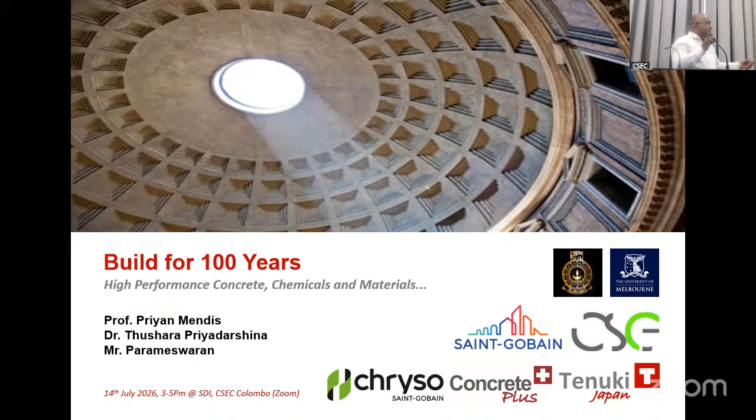This is where I studied, Civil Engineering, and this is where I have worked. I have been in the industry, corporate sector, as an engineering contractor and engineering consultant in different phases. Then I joined Holcim, worked there for almost 10 years. Holcim then became Lafarge Holcim, then Insee. Later, after my PhD, I joined Open University, where I can work until 65.

This is my corporate background. I have been chairman, as I was told, for 2 years. At that time I was director for the Tea Board, National Institute of Plantation. Then at Thurusaviya I was chairman for a short period, about 3 months, just to close it. Then director for the Tea Board, I was coordinating secretary for the State Minister for almost 1 year. I was also director for International Relations at Open University, and I have two companies, but very small ones.

Out of all this, I have been in many industries. I hope today I will share my experience with you, especially related to concrete, which I have been practicing for over 20 years.

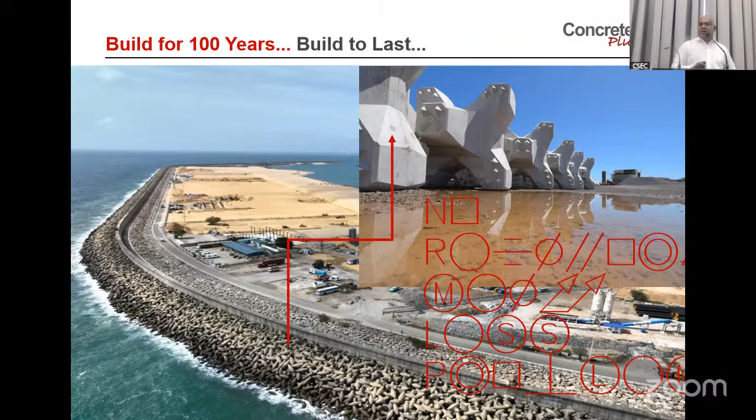So then if you use reinforcement, actually concrete is like our body. Because we are going to design for 100 years, we should imagine how we can do it. So like our body, why don't you resist for, say, at least 70 years? Because you get some issues from outside, so you have to protect your concrete from outside. And there will be some issues inside, like cancer in our body.

Concrete. But today we are not going to discuss all the durability, what are the types of durability. But I'll tell you how you can design a concrete structure to last for most of the durability. So that's my main point.

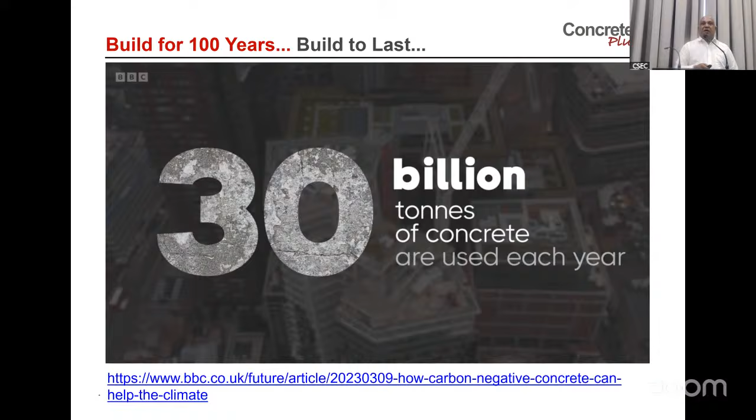So this is reinforced concrete 120 years ago. Concrete is used in the world at 30 billion tons. No one can avoid this material. It's the most used construction material, the highest one. So in the world, if you take almost all the major structures, they have been either concrete or

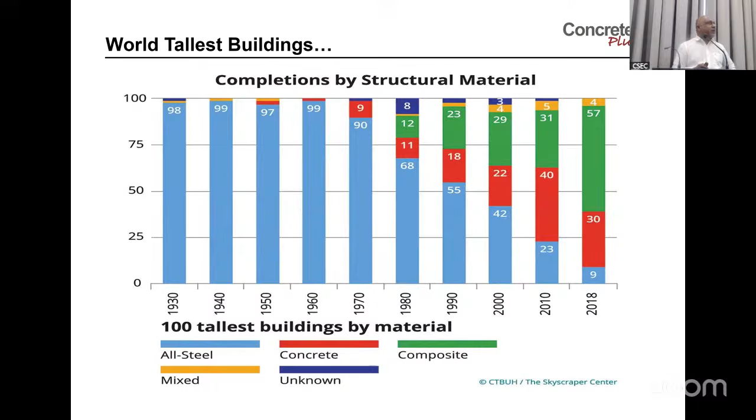So in Sri Lanka also we have similar structures. This is the history around 100 years back. No one thought that you could build structures with concrete, especially high-rise. But later, with the development of concrete and chemicals, people went into more concrete, and nowadays more composite. But the only thing is, you have to design concrete in a way that it lasts. So this is where high performance concrete comes in.

So if you have a question, what is high performance concrete? It's very simple. So what is normal concrete? You get cement, fine aggregate, coarse aggregate, water. And of course, you can add some other material, maybe fly ash. But when it comes to high performance, you add fly ash, then silica fume, or slag. In Sri Lanka, we don't really have slag. And actually, some countries add finely ground mineral.

So even though we don't like, I think you don't like quarry dust, you know. Nowadays, you are allowed to use manufactured sand or quarry dust in concrete. But if you recall 10 years back, no structural engineer allowed some of these materials. They wanted virgin sand. So some countries add finely ground material into concrete.

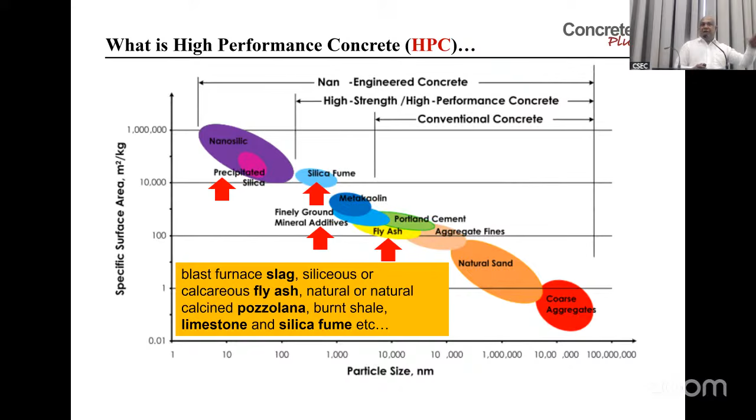So as an example, cement fineness is around 3,000. Okay, this is a number. But this fine material is around 6,000, even double the fineness of cement. They add this material to make the concrete dense. So it can be nano material. Likewise, we can work. First of all, we need to understand the physical and chemical properties, then how much we can add and what the optimum levels are. So that's my main frame.

So here, if you want to make a structure last 100 years, of course, you have to go back to basics. Just basics only. So you go back to basics. Okay, we go to the next slide.

So we know that concrete is very simple. You make it tight, so that is why we very importantly need to be careful. We need to know about cement, fine aggregate, coarse aggregate you get locally, fly ash, slag, microsilica. So first of all, in Sri Lanka, I'll just tell you the cement process. Whatever type of cement you make, first you need limestone. Then you go through this process up to the clinker level. Then you get the clinker.

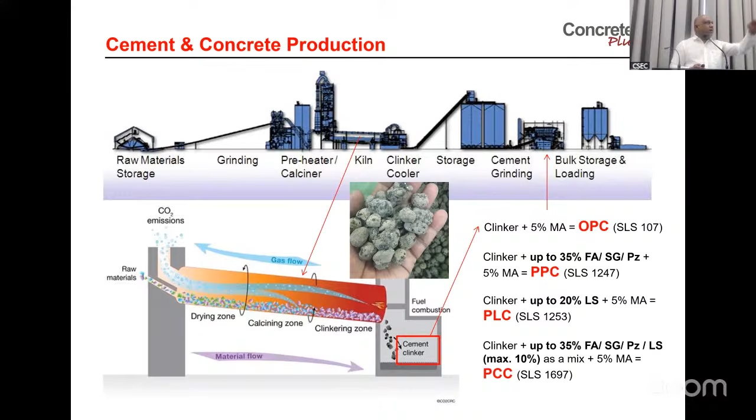So cement is clear. If you want to know more about cement, refer to EN 197-1. This cement standard is the European standard, and they talk about 27 types of cement. In Sri Lanka, most of our cements are derived from them. When I was in the cement industry, we had OPC and Holcim Extra, which is 21% fly ash, used for lower cover. In between, we found another cement with 6 to 20% fly ash, which is good for high-rise buildings.

So this is the standard. If you want to refer to it, you can download EN 197-1 2011 from Google. Later versions are there, but this one is downloadable.

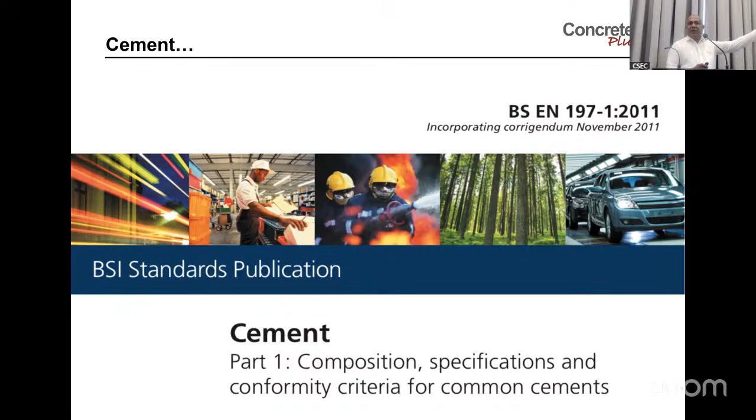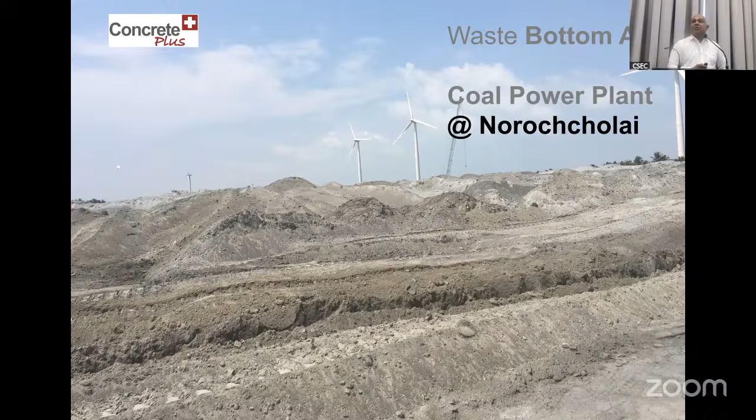If we go back to the materials we can add into concrete, it can be fly ash. This is not the power plant; what you see here is the coal yard. When you burn this coal in the power plant, you get fly ash as a byproduct. What you see here is bottom ash. It's a yard, so no one uses it at the moment. There's a huge amount of bottom ash at Norochcholai. This photo was taken years back; I'm sure now it's more than this.

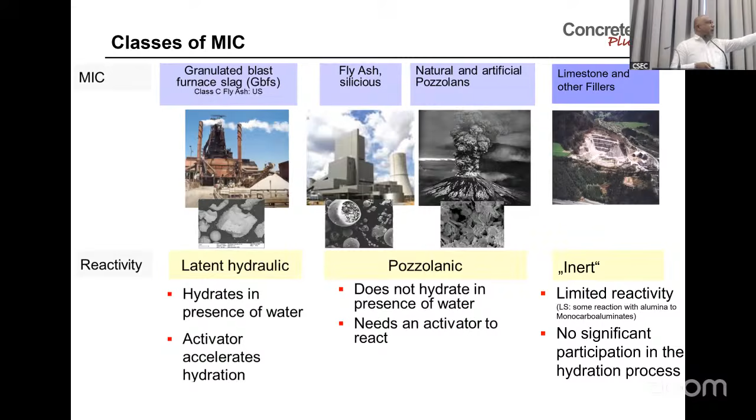Other pozzolanic materials are flaky. This is the same thing, so I can skip it. Clinker has a fast reaction, slag a very slow reaction, fly ash no reaction, and fly ash plus lime, there's a reaction. So cement has a reaction, slag has a very slow reaction, and all the pozzolanic materials react when there is lime. That's why in the past they always used ash with lime. To activate any kind of ash, you need lime.

If you can play this. Okay, no, forward.

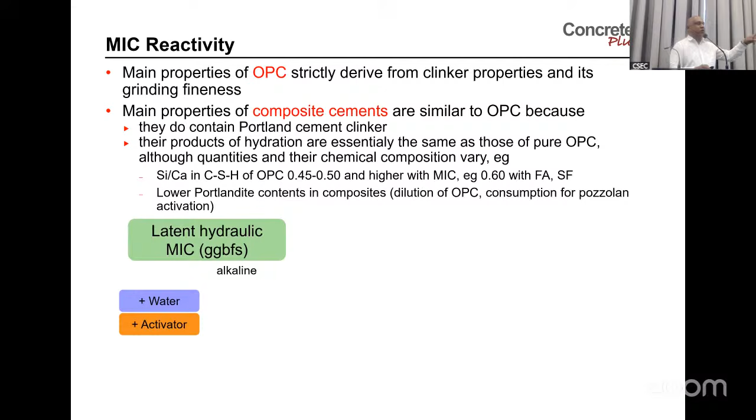The same thing is shown here. Slag, you need water, then the activator. Portland cement, you need just water. And pozzolana, you need water plus lime. From everything we produce calcium silicate hydrate, CSH, which is responsible for strength.

So if you have cement, you just need water, then you can have strong concrete. If you have pozzolana and you add lime into it, you can have concrete. This is what we call geopolymer concrete. Different words can be used, but any ash can be activated with lime. Slag similarly, you can go with an activator.

This is a very small concrete particle. If you see it through the scanning electron microscope, it looks like this, like a jungle within the concrete. What you see here is a very small one. It has to be gold coated or carbon coated, then you put it in the machine. Like when you check your blood to see what is inside, you can check it. So this is inside concrete.

You can see the magnification is 5,000. So it's like a jungle. It's like an X-ray, actually better than an X-ray because it's enlarged. Then whoever knows about concrete can tell us what is inside and what is going to happen. I'll show you a very good example.

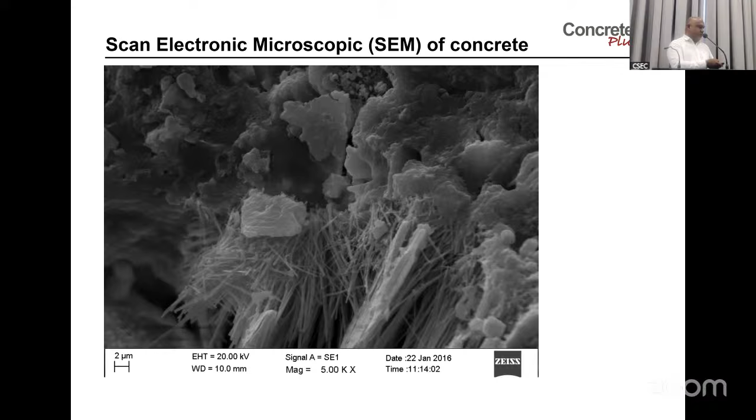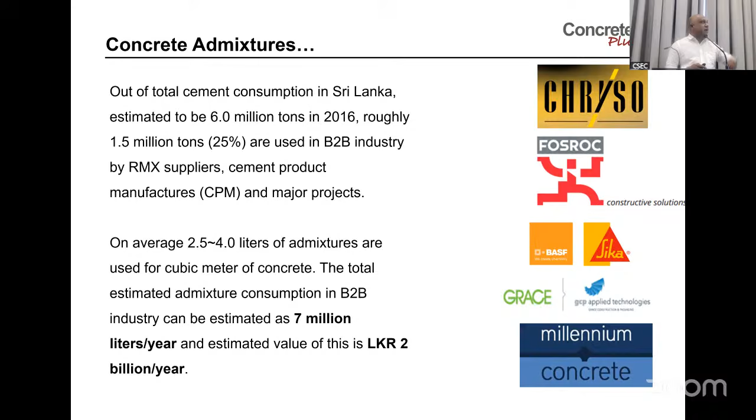So with the development of chemical admixtures, the industry has gone to a different level. Actually, Mr. Param in the second session will discuss chemical admixtures. And especially today, he will stick to waterproofing in the basement area. But he will just tell you about both of the admixtures.

So this is the concrete specification, BS EN 206. There's a complementary specification as well. So if you want to know anything about concrete, this is the specification to be followed. So I tell you, even though we have thousands of specifications, in concrete, always the basics matter. That's it. Nothing else. If you stick to basics, you can make wonders, you can make structures. I'll show you why. If your water cement ratio goes beyond 0.5, there's no point discussing durability. There's no point of discussion.

Plus, as I previously mentioned, when you add reinforcement into your concrete, we assume that your concrete is homogeneous. All your calculations assume that. So you have to make your concrete homogeneous. There should not be honeycombing and all others. Of course, there will be, but at least you have to protect your reinforcement. So the most important area when you add reinforcement in concrete is cover. That's very important because you have to protect it. It's like our body, you have to protect everything from outside. So you need to have very good skin on your concrete.

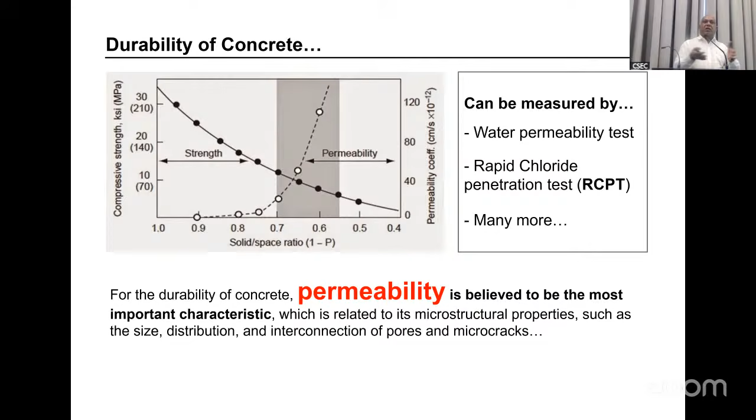So all these theories tell you the same. This shows in different ways how it works. You have to reduce permeability in your concrete, and of course it will increase durability. As I mentioned, today we are not discussing the different durabilities. But if you reduce permeability, water permeability will be low, RCPT will be low, all the material brought into the concrete will be very low.

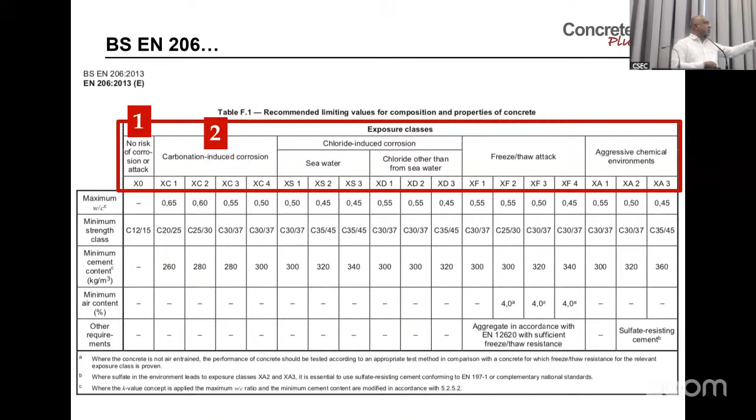The second one is carbonation. In carbonation, why are you allowed to go up to 0.6, 0.65, etc.? Because the carbonation depth per year is around 1 millimeter. So if you have a 50 millimeter cover, just to reach there it takes 50 years. So that's why there is a little bit of relaxation. But if you have corrosion induced by seawater, then you see the water cement ratio is limited to 0.5. Other than seawater, sometimes you also have a maximum of 0.5.

Then freeze-thaw, we don't have much here, but heating and cooling is very similar to that, but we don't go to that extent. And aggressive chemicals, these are the most common ways. So these are the recommended maximums. You have to be below them. That's why I told you that if you want to design very good structures, please be around 0.4.

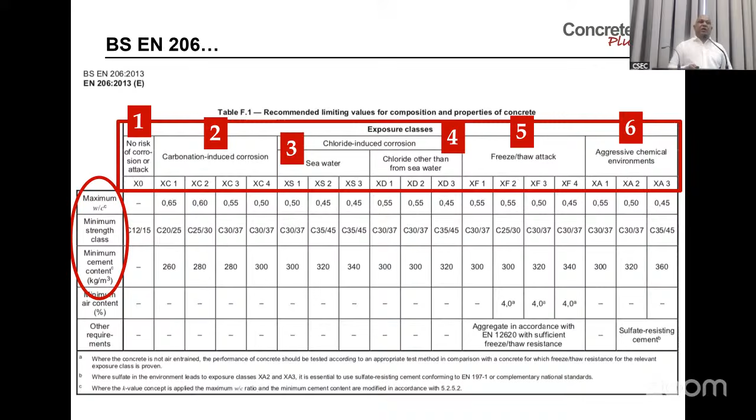And second, the minimum strength class you also need to be careful about. What are the minimum strength classes? Then the minimum cement content. Sometimes you don't worry about the maximum cement content, but maximum cement content is also very important. I'll show you a very good example. You should stick to below 550, as in most of the standards. So all these standards tell you the same thing. In ACI, similar parameters are there. So I don't want to discuss it in detail.

So now I'll show you these applications involved, so then we can see how it's going. So this is Burj Khalifa. It's in a very aggressive environment. You can see the location has almost all the aggressive conditions. So as I mentioned, we don't want to divide into the different aggressive issues. We will address them as a whole, as a body. So we will make our body very robust, then no disease can come. A similar approach.

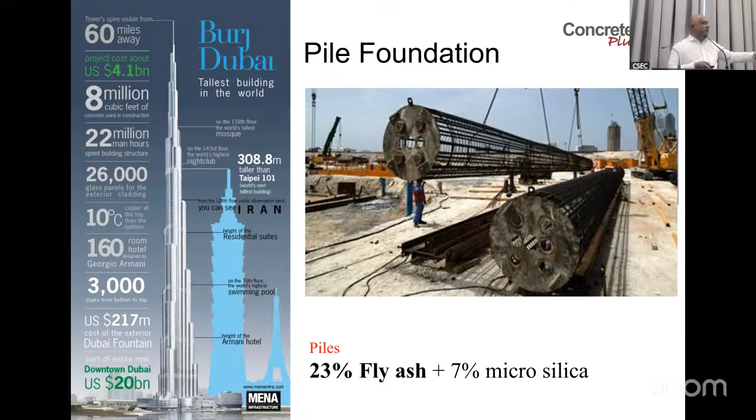But okay, as a contractor or anyone, once it is placed, you don't see it below. And workability really matters to you, isn't it? Workability really matters because in the ground, if everything flows and it's self-compacting, it works very well. So what material do you use? The best material is fly ash. This is the reinforcement structure, I don't want to explain it in detail. This is the process, but they have used this combination: 23% fly ash plus 7% microsilica.

So then our question is, why 23%? Why microsilica only 7%? Because just to have durability, if you use only fly ash, you need to have at least 25% fly ash. But when you use it in combination with microsilica, around above 25% in total will give you very high durability plus strength. So that's why they have gone with microsilica, to get the required strength, workability and durability with the combination. That's why they have gone 23%, higher, not 10%.

Now this is done. Second one, pile cap. What is your solution? Now it's easy, we have done one. What is your recommendation? OPC, fly ash, or slag? What do you think? In this case, as Mrs. Romal mentioned, you can go for fly ash, but they have used slag.

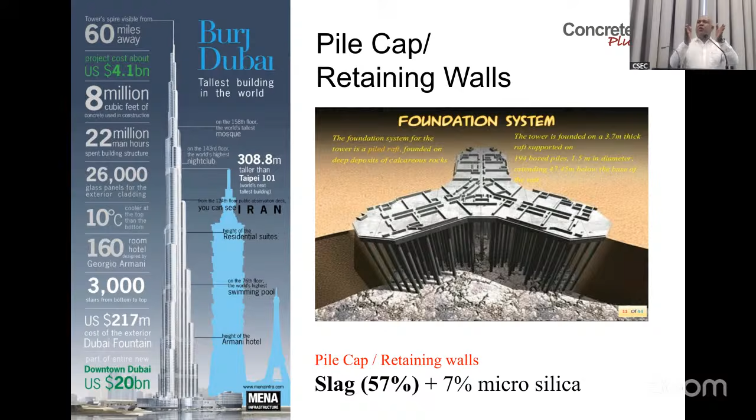You need to have at least 20-25% fly ash in that category. You add slag about 50, fly ash about 25. These are the things we need to keep in mind if you want durability. But if you want strength, it's a different thing. Microsilica, all standards limit it at 11%, so usually 5 to 10% is the very good area to use.

So the second case is over, now the third one. Now we are going to pump your concrete up to the top. They have pumped up to, I think, around 500 meters. Although this is 800 meters, so 600 meters. I saw a photo with Professor Rian at 600. So now you are going to pump this concrete - what is your material?

Fly ash, fly ash. Why is the amount low? Because the durability issues are not much there. Second, if you add more fly ash, strength goes down. So durability issues are not critical because they're at 18%, 18 plus 9 means 20 plus means durable. But you need to have certain strength. Strength is the critical one.

So this is all the columns and all that, and you should be able to pump the concrete. You can make the best concrete maybe in the Lotus Tower on the ground floor, but if you want to pump it to 300 meters up, it's a different case. Then you have to work on different workability and everything. Of course, what I'm telling is only about this material, but they have used a lot of admixtures, which I'll show you later. Technically, if you want to use this material, this is the general guide.

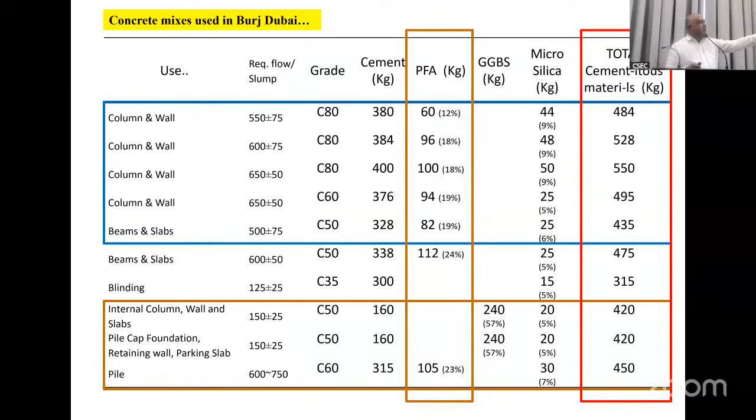You can see fly ash is in between 12 to 24%, and microsilica 5 to 9%. These are the things we need to get into our mind. Just thumb rules - as engineers we should know where these values are moving.

So this is the complete mix design of the Burj Khalifa, which is available on the internet. You can see the amount of admixture they have used is very high. Usually you use 1% of the cement in admixture, but here they have used up to 3%, 4%, sometimes even 7%.

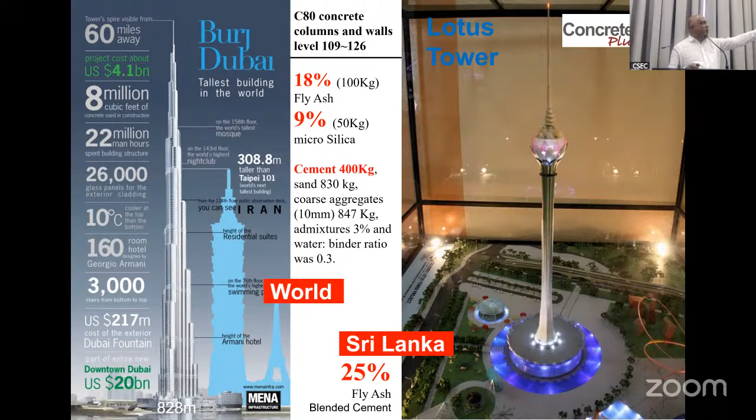Even though I show it nicely that when you add fly ash it flows up to 600 meters, it doesn't - but with the admixture plus the fly ash, it goes. That's why you can see in the Burj Khalifa they have used, this is grade 80 concrete - you can see how much cement they used, only 400 kilograms, this is OPC, plus fly ash 100 and silica 50, altogether 500. And they have gone up to 3% admixture, water cement ratio 0.3. And of course aggregate size they've reduced up to 10 millimeter because of pumping. So as I mentioned, even though there are 100 standards, if you stick to basics, you can make things last for years.

So I think I'll go fast. How many minutes more do I have? Five minutes. Okay, okay, five minutes.

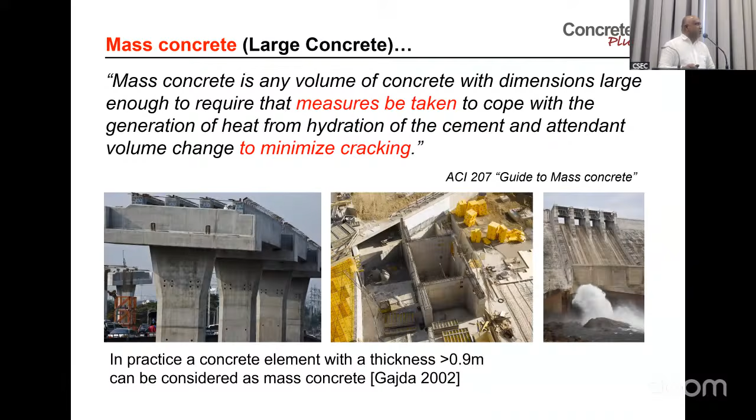This is what I told you about mass pouring. In mass structures, you need to stick to two things: one, the temperature at any given point should not exceed, very roughly, 70.

And the temperature gradient should not exceed 20. This means that concreting in Nuwara area, mass pouring is much more difficult than in town, because the surface temperature is very low, so the gradient can be higher in Nuwara.

So for mass pouring, you have to do concrete modeling. I think some of the cement suppliers have this, so you can model your concrete and see what the strength and temperature will be. So you have different challenges.

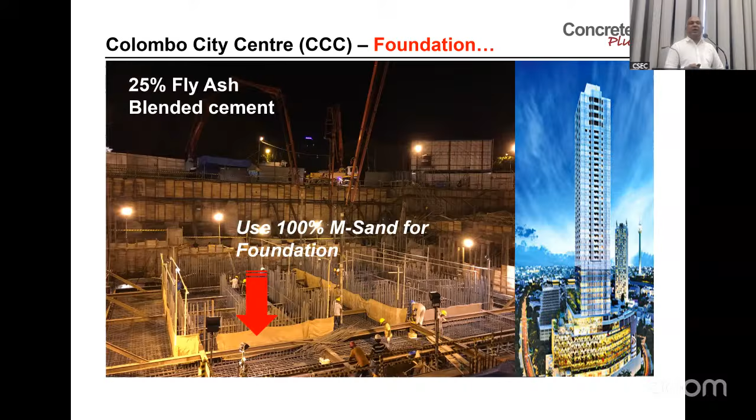So this is kind of the structure. As engineers, what we face is architects draw different drawings, but as engineers, we should be able to build it. When we build a vertical, they want to rotate it, then sometimes you have to make it turn. In the future, we don't know where it goes, so we have to be ready for it.

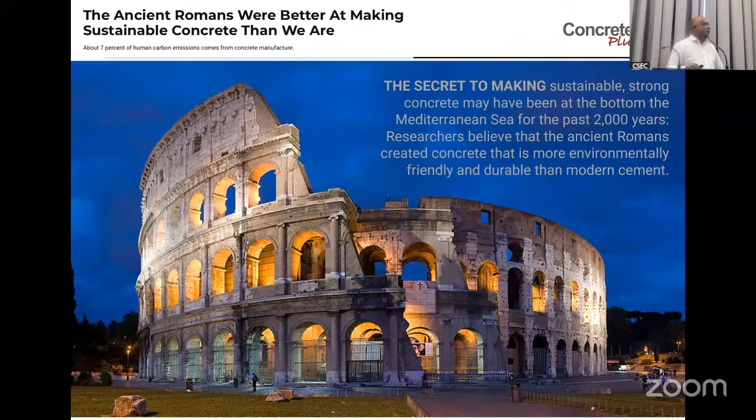So with that, the future of construction is sustainability, where we have discussed all these. I'll omit them because we have limited time. So as structural engineers, architects and all other departments here, I will ask you to use recycled material as much as possible, like in this building.

You can use anything in your home. As an example, I think he has used hair, clothes and all that. Even in the past, when we didn't have anything, they used horsehair in concrete because it's good for tension. It will not give you surface cracks because you can use just hair. We have a lot of hair, enough hair from salons you can collect and use it.

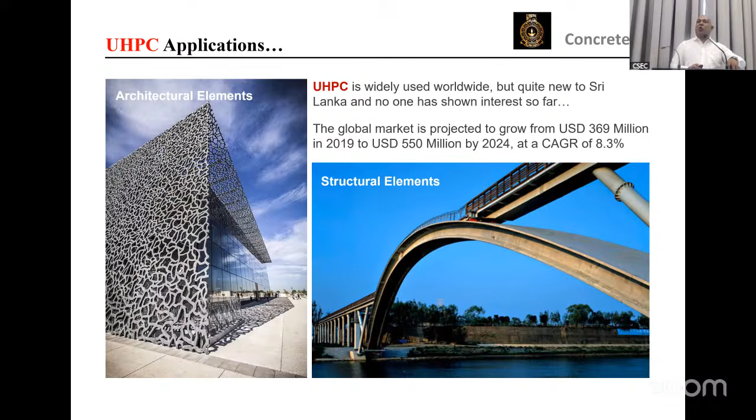And ultra high performance concrete comes into the picture. The maximum size of aggregate is 2 millimeters. So even though you say it's concrete, not concrete, we call it ultra high performance concrete. It's like a toothpaste-like material, which gives you 150 MPa. It's really good for this kind of cladding and all of this.

And this is an exact sample I checked in Malaysia, because they had done this structure in France when I was working with them. So we can go on to fiber reinforced concrete, self-cleaning concrete, floating concrete, pervious concrete. So likewise.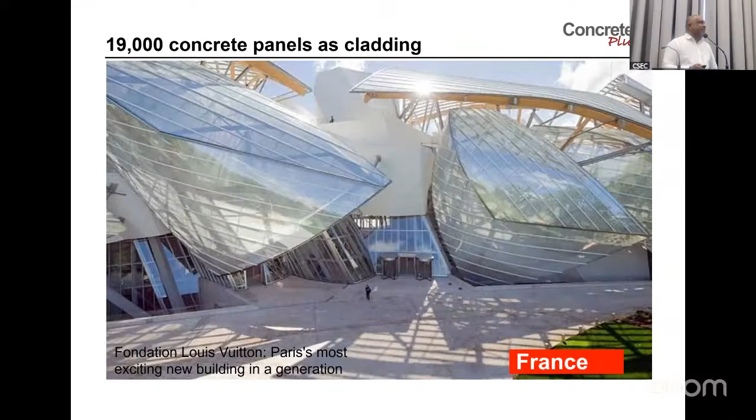This is facade. Some of the facade, concrete facade, is very popular. In the structure, 3D printing has come into action. You can even make concrete transparent. So with that, thank you very much.

But I think before I conclude, I will give you a few slides, as usual. So if you forget about concrete, it's okay to break rules.

This is how I worked as chairman. I think I was the only chairman who followed the speeches, but in the evening. So life is not meant to be too serious.

So forget about the concrete. Enjoy today. Enjoy this moment. Enjoy the evening. So if you can sleep tonight very well, then you are done. So one life, live it. It's not meant to be too serious. So wherever possible, find the joy. Work hard, play hard.

So be with your team. They raise you, please remember that. It's very important. Without the team, you cannot be a leader. Nowhere in the world has there been a leader without one. So if you can make your team bigger and bigger, you will become a better and better leader. That's very important.

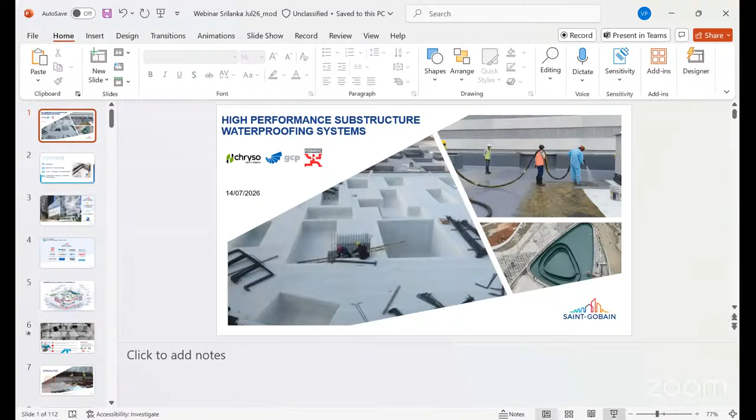Welcome you all to this presentation on substructure waterproofing system. Dr. Tushar talked about designing concrete for 100 years, and the various cement replacement materials. But when it comes to waterproofing, it is basically a system done as a barrier to prevent any kind of water ingress into the concrete. The basic necessity for providing this system is to enhance the durability of the concrete so that it serves its purpose for the design of its life.

In this part of the presentation, I will give a small introduction about our company, which manufactures waterproofing products. I'll give a briefing about why we need to waterproof the concrete structure, then touch upon some international standards used for designing waterproofing systems, and the different products and solutions available for substructure waterproofing. Today's presentation is mainly focused on the products and solutions used for protection of concrete against water ingress in below ground structures.

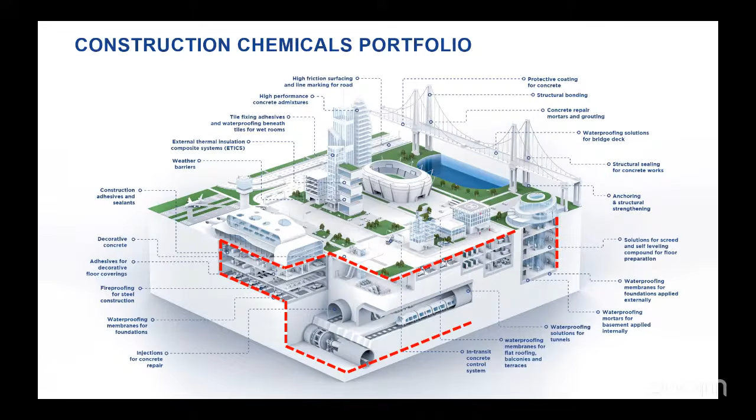When it comes to the construction chemicals portfolio of the CCB, we offer a very comprehensive product range for various applications in the construction industry, whether for building, infrastructure, energy, or other applications. We have more than 500 products broadly classified under 12 product segments, offering a comprehensive solution for the construction industry. I'm not going to talk in detail about all these products due to shortage of time, so I will jump straight into today's discussion.

When it comes to substructure waterproofing, basically for any waterproofing in concrete, first we need to know why we need to waterproof the concrete. Is it really required? There are some important reasons why concrete structures require waterproofing. One is that concrete is not always impermeable to water. During the discussion with Dr. Tushara, we came to know that one of the important tests for measuring the impermeability of concrete is the water permeability test, because when we do a concrete mix design, basically we design the concrete at a certain water cement ratio.

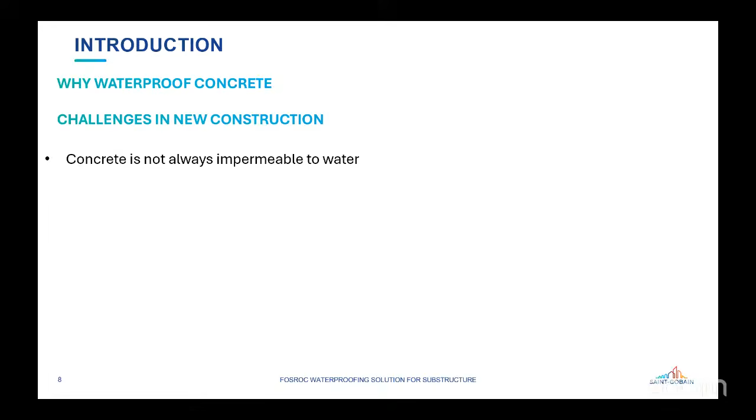If you take a concrete mix, the water cement ratio required for complete hydration of the cement is 0.27 or 0.26. But it's not possible to work with such a low water cement ratio because the concrete workability will be very low. So we normally add some extra water to make it more workable, and eventually that water leaves the concrete after hydration, leaving small voids and pores inside the body of the concrete. When this concrete is subjected to hydrostatic pressure, there could be water ingress into the concrete. So it's very important that we provide some kind of barrier on the surface of the concrete to prevent water ingress due to hydrostatic pressure.

Second is the bad workmanship or quality control issues and the honeycombs or voids that can come in a concrete structure. For example, it's not always possible to make a 100% perfect concrete structure. Sometimes we end up having some kind of defects such as honeycombs, voids, aggregate finishes, cracks, and many other defects in the concrete structure. So these defects will become a potential point for water ingress into the structure.

So it's very important that we prevent water seepage by providing some kind of a barrier system on the concrete surface, which is basically done with a waterproofing system. Also, we know that the curing of concrete is an exothermic reaction. It releases a lot of heat. So when we do concreting works, particularly bulk concreting works, where we need to construct a raft of thickness about 3 or 4 meters, or a roof slab, very thick concrete.

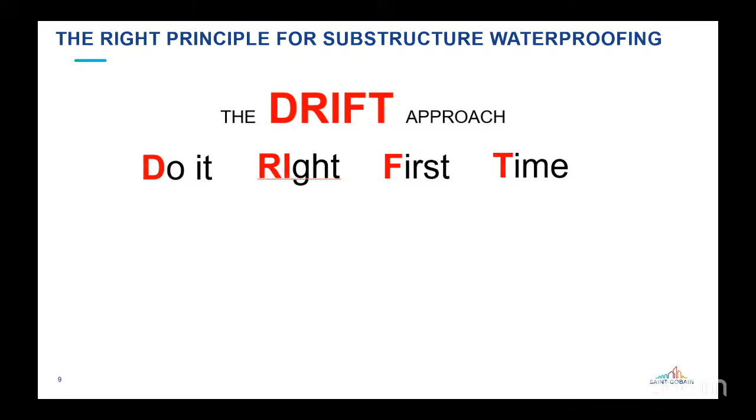So when it comes to substructure waterproofing, it's very important that we follow the right principle. I would call this a DRIFT approach, meaning do it right the first time. Because substructure waterproofing is unforgiving. If you make a mistake, if you don't select the right waterproofing system, it is very difficult to redo the waterproofing, because once you have the waterproofing treatment outside, particularly in a basement structure, once it is backfilled, if the waterproofing system fails, it is not possible to remove the backfill and redo the waterproofing.

So the only option is to provide some kind of treatment from inside, which will not be a 100% watertight system. So we must follow this DRIFT approach so that the right waterproofing system is selected and we do the right waterproofing the first time. So how do we do this? Prevention over correction. Quality has to be built into the design in the initial phases, and the clear requirements, specifications, standards and customer needs should be fully understood before execution of the work. Then we have to follow the inspection test plan, the method statement, the shop drawings, and every detailing needs to be properly done before starting the work.

And then we have to ensure that the work is done by a properly trained applicator. So all these processes are very important when it comes to substructure waterproofing.

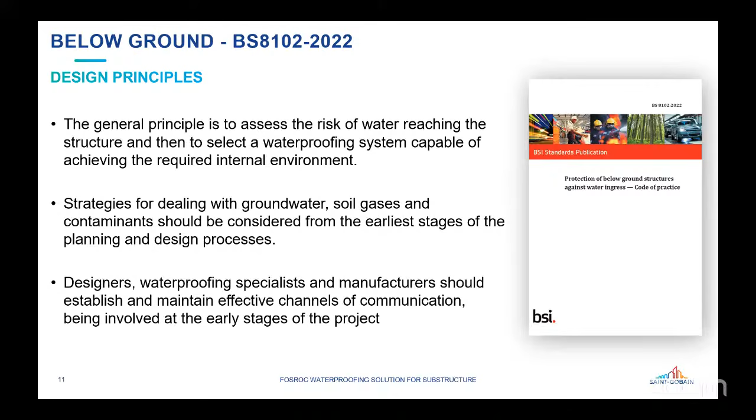Now, when it comes to substructure waterproofing, as far as standards are concerned, there is a standard which is very widely used all across the world, which is BS 8102. This standard provides guidelines for selecting the right waterproofing system for substructure waterproofing. It basically assesses the risk of water reaching the structure, and provides guidance on what needs to be done to select the right waterproofing system. It starts with the site inspection and data collection.

For example, whether it is a tunnel, any kind of underground structure or a building basement, the most important thing is to carry out the site inspection first, and data collection is very, very important. It talks about assessing the hydrogeology and the geology of the area. Basically the soil type, which is very important, because with different types of soil the behavior will be different, the foundation design will be different, and we need to ensure a proper waterproofing system is chosen for that particular soil type, so that it remains robust and can withstand any movement or settlement that may happen in the structure.

And then we need to evaluate the flooding risk in that area. Flooding risk, I would say that in some areas the groundwater table level can rise and can come down during rainy season, or you could be constructing a structure which is very close to an ocean or to a river or near any water body. So all the possible risks of water coming in direct contact with the structure must be properly evaluated during the site inspection. And also, like I mentioned, all the external sources of water also need to be properly documented.

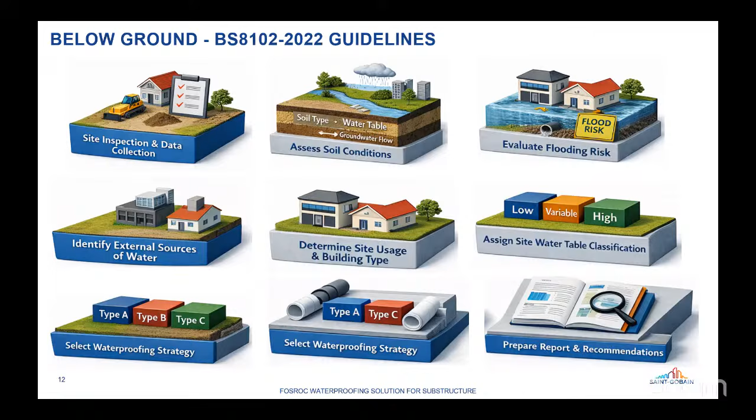So once the proper analysis is done and the site inspection data is collected, then we can make the right specification, select the appropriate material for that particular situation, and then submit the report for the consultant or client approval.

If you see, BS 8102 is a code which got revised again in the year 2022. As per the latest revision of the standard, the most important recommendation is that the waterproofing system used for the substructure should be a fully bonded waterproofing system which bonds to the freshly poured concrete. So this is very, very important. We will discuss this particular recommendation in detail in the next slide.

And then it also says that even if there is no water present at the time of construction or during any kind of survey, it is always good to consider some kind of water pressure, because many things can change during the service life of the structure. The water level in that area can rise, it can come down, or the hydrogeology of the area can change. So even if there is no water pressure in that area, we must consider a minimum water pressure of 1 bar while designing a waterproofing system.

And importance should be given to any kind of anchor piles, props, walling beams, pipe penetrations, construction joints; proper detailing needs to be done in the waterproofing design. So there are three important considerations for selecting the right substructure waterproofing: the groundwater table level, the intended use of the basement structure, and the construction method.

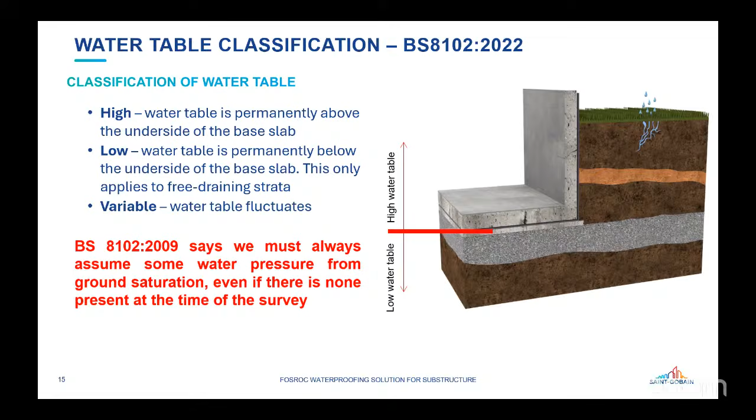So coming to the basement grades, the standard recommends three types of grades, depending on the usage of the basement and what degree of water tightness is required for the particular type of structure. So whether it is a car park where some water and damp areas can be tolerated, or a ventilated residential or commercial area where an absolutely dry surface will be required. So depending on what purpose this basement is going to be used for, we need to select the right waterproofing system.

And also it talks about the construction method, because when it comes to basement construction, there are different types of construction techniques that are used. We know commonly about the bottom up and the top down approach. So in some cases, the basement structure is constructed with some kind of a working space between the excavated surface and the retaining wall. You can see here.

This is basically called unconfined basements, where you can do the waterproofing and then you can do the backfilling. In some cases, these are called the confined walls, where the total boundary perimeter of the plot will be used for the construction. In this case, the waterproofing has to be done against the shoring and the basement wall will be constructed with a single side formwork.

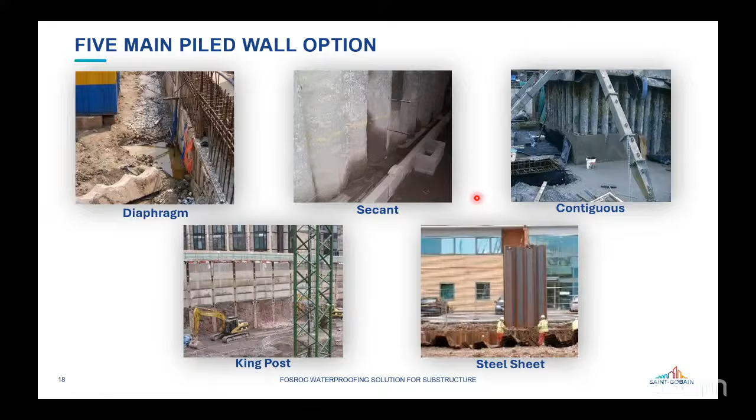So based on all the survey reports, we need to select the right waterproofing system for the basement. There are three types of waterproofing system recommended by the standard: type A, type B, and type C. So what is the type A waterproofing? Type A waterproofing is basically a waterproofing system done on the external side of the basement structure. Here we are providing some kind of an envelope, completely encapsulating the structure with a waterproofing treatment from the external side.

And in type A, we have the sandwich waterproofing system also. Basically, in this type of system you have some kind of a diaphragm wall, and then you're constructing a retaining wall against the diaphragm wall. So the waterproofing system will be sandwiched between the diaphragm wall and the retaining wall.

And then we have the third type of waterproofing, which is an internal waterproofing. Here you can see that the waterproofing system is applied internally, because if there is no external waterproofing, or if the waterproofing system has failed, the only possibility is to do the waterproofing from inside. So this is called the internal waterproofing system.

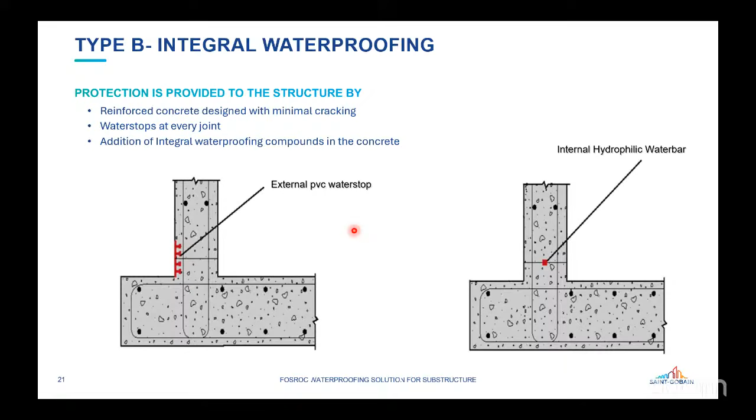So the type B system is basically an integral system in which we are trying to make the concrete structure itself waterproof by adding some kind of chemical admixtures to the concrete. And here only the joints will be treated. For example, if you have a construction joint or movement joint, all the joints will be treated with some kind of a water bar or a PVC water stop, so that the structure remains watertight.

So here the procedure is that we have to design a concrete with a very low water cement ratio to produce an integral waterproofing for the type B system. A concrete mix has to be designed with a very low water cement ratio. Once we reduce the water content in the concrete mix, the voids and the pores in the concrete will come down.

And then in the same concrete mix, you add another admixture, which is basically a crystalline admixture, which will react with the products of cement hydration and form insoluble crystals inside the body of the concrete, which will seal all the voids and pores. So the type B system, an integral waterproofing system, is a combination of two products: the first is a high range water reducer, and the second is a crystalline waterproofing compound.

And the third type of system as per the standard is the type C system, which is the drained basement. In this system, normally some kind of drainage layer is provided on the external or internal side of the basement, so that any water pressure coming on the structure will get into the drainage layer and get drained to the perforated pipes, which are placed in the soil below the retaining wall.

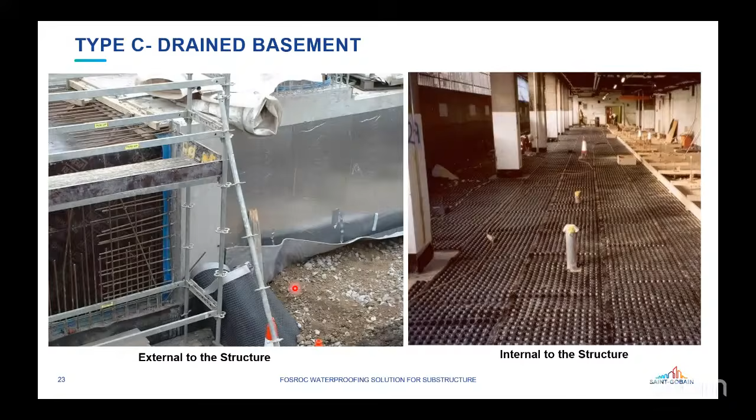So those are three types of the waterproofing system as per the BS 8102. So depending on the soil conditions and construction methodology and all that, we need to select the appropriate waterproofing system for the structure. So that was a briefing about the standards, the 8102.

And then there are the pile tops, pile heads, which require special treatment. And then we will have the joints and penetrations in the retaining wall or in the base slab, obviously the movement joints, construction joints. There could be some earthing rod penetration, rock anchors, then pressure release pipes, and then tie rod holes. So when we design a waterproofing system for a basement, it has to be a very comprehensive design, including all these penetrations, and then the retaining wall and the base slab.

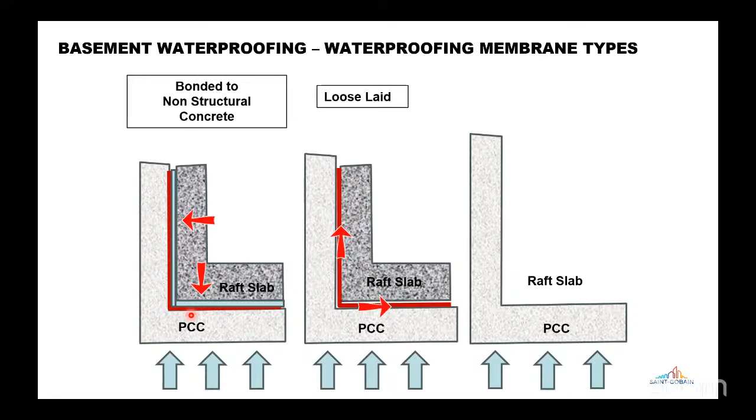And then the second system is basically a loose laid waterproofing. This product neither bonds to the structural concrete nor to the non-structural concrete, and it remains as a loose sheet between the structural concrete and the non-structural concrete. So this is another type of waterproofing membrane. And the third type of membrane is basically as per the BS 8102 standard, which is fully bonded to the structural concrete. So here, this product, when applied on the substrate, can bond to the freshly poured concrete. And what are the advantages of using a pre-applied waterproofing system, we can see in detail now.

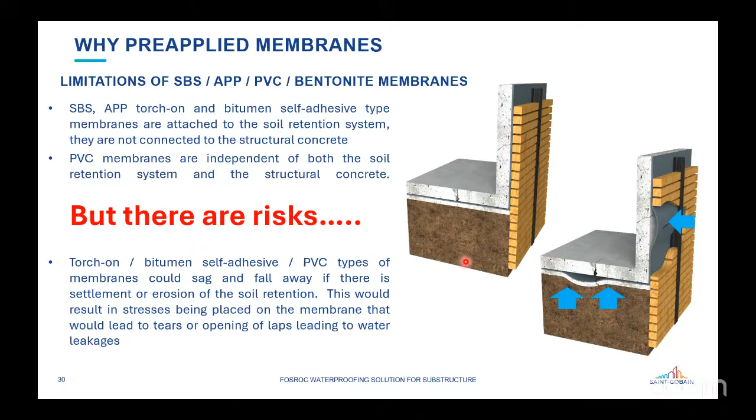So this is one of the biggest risks of a product which is bonded to the PCC, and there are a lot of failures we have seen with this kind of system, due to which new generation waterproofing systems have come to the market, and even the standard, BS 8102, recommends using that kind of system. The system I'm talking about is basically a pre-applied waterproofing membrane based on HDPE. It is fully bonded to the raft and the retaining wall. Here you can see that the waterproofing membrane is bonded to the raft slab or to the retaining wall. With any kind of settlement of the structure, even if there is a gap formation, since the membrane is bonded to the structural concrete, the waterproofing integrity of the structure can be maintained.

So this is one of the biggest advantages. And also these products are very good based on the application ease and a lot of other factors: cost saving, labor saving, many other advantages we can achieve by using this pre-applied waterproofing system.

Now, this is one of the products we have, which is called Proofex Engage. And this is a product, again, a pre-applied waterproofing system. If you see the design of this product, it is basically an HDPE sheet which has got a mesh kind of a structure on the top. So when the concrete is poured on this waterproofing sheet, this mesh structure will get embedded into the fresh concrete, and it bonds to the structural concrete here.

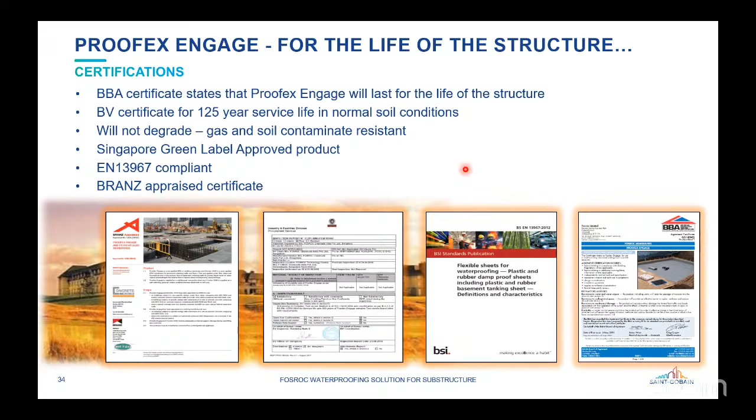So when it comes to the different types of tests, we have carried out a lot of tests for this product. And one of the important tests is, we can see here, the 125 years service life, which is tested as per EN 13967. And this test is basically to check the durability of this product for a period of 125 years. And this product is resistant to gas and soil, different kinds of chemical resistance this product has, and also it is a BBA certified product.

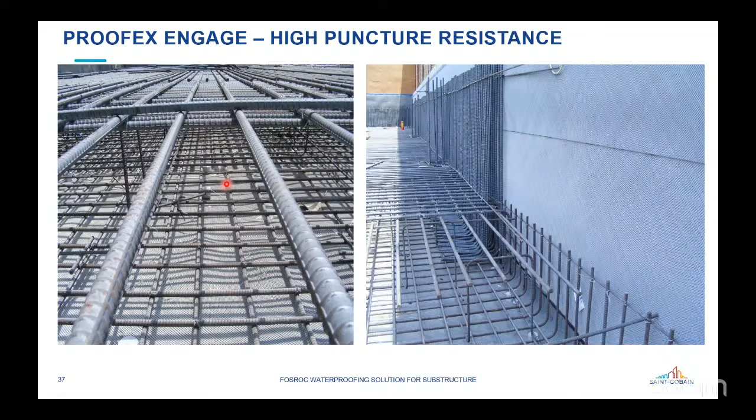So on the vertical surface, when this membrane is fixed, it is fixed on either cement board or a sacrificial formwork, or you can even use a marine grade plywood. It is fixed using a double-sided tape on the vertical surface, just to secure the membrane in position till the concreting is done. Some more photographs on the vertical side, and you can see the spacer bar here.

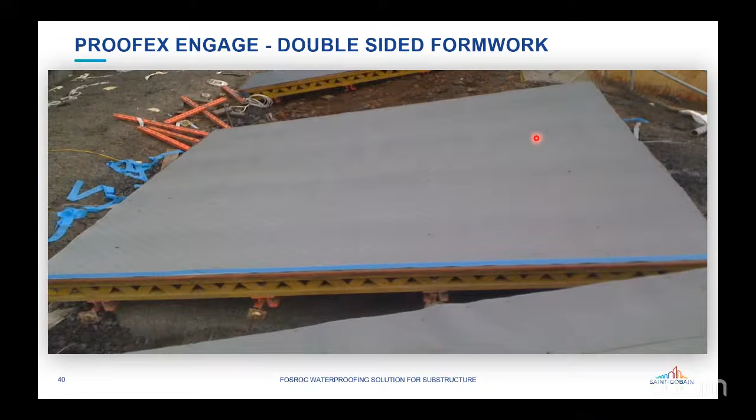This product can also be used for the double-sided formwork application, where you can fix the waterproofing membrane inside the formwork, and then the formwork is erected and the concrete can be poured. So here you can see the application photo. So this is the vertical surface on which the membrane has been applied, and on the horizontal surface all the pile head detailing will be done, and the reinforcement can be directly placed over the membrane.

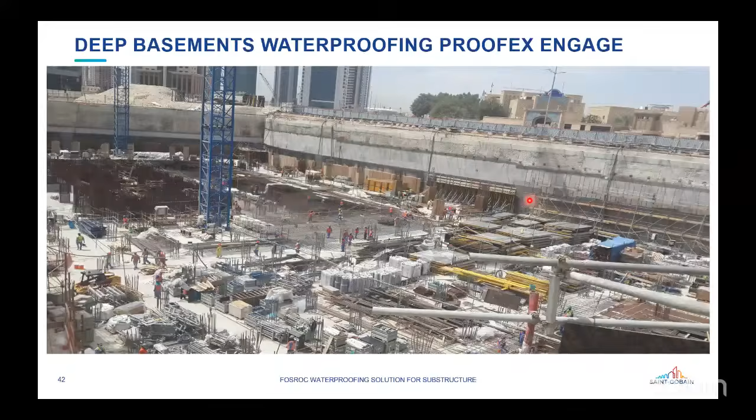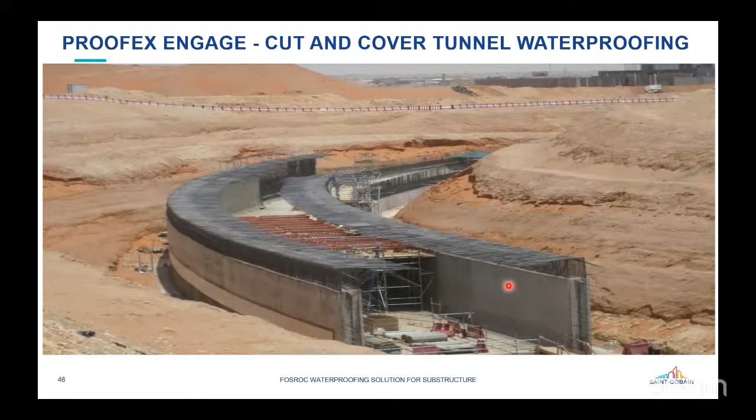So this is how the cut and cover application is done. Here you can see this is the retaining wall, and this product is applied on the external side, and then later the backfilling is done.

Now I'll just give a glimpse of a case study of a project where this product was very extensively used. This is a project in Qatar called the Mega Reservoirs project, one of the largest water storage reservoirs in the world. There are about 15 huge reservoirs, and every reservoir has a storage capacity of about 100 million gallons of water. This project is in the Guinness Book of World Records as the largest drinking water reservoirs in the world.

This work was executed in the years about 2015 to 2018, for 3 years.

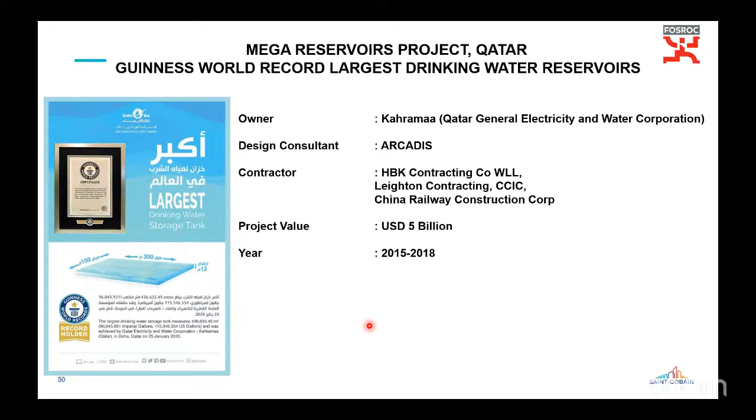Here, if you look at the design of the waterproofing system for this water storage reservoir, the height of this reservoir is about 12 meters, 6 meters buried inside the earth and 6 meters above the ground. The waterproofing system was done for the portion of the reservoir which is 6 meters into the soil.

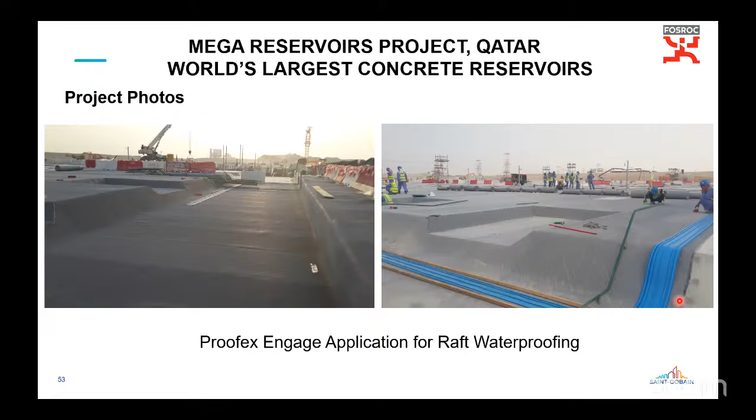So some more photographs. You can see the kind of reinforcement here, which are basically epoxy coated rebars and very heavy density reinforcement, because this product does not need any kind of protection. So this is a very robust waterproofing system, so they can directly place the reinforcement, and it will withstand all kinds of site abuses during the site activities.

Some more photographs of the project. This was a very huge project, and one of the largest waterproofing jobs, I would say, where 400,000 square meters of waterproofing membranes were installed.

More than about 580,000 square meters of self-adhesive waterproofing membrane was applied to the vertical side, and the quantity of water stops used in this project was 90 kilometers of PVC water stop, internal and external, and then roughly about 110 kilometers of reinjection hoses.

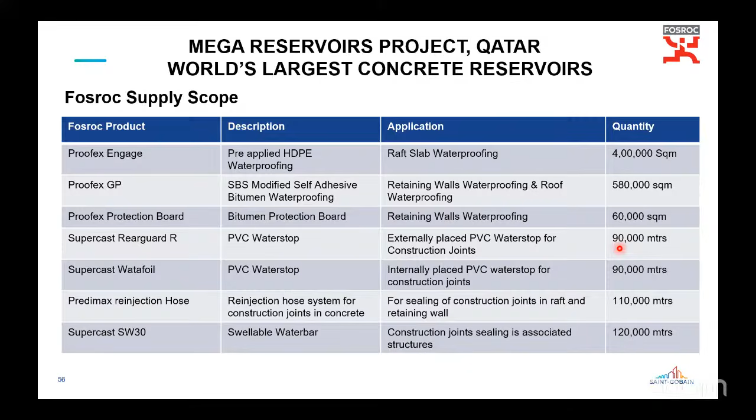It's a huge project, one of its kind in the world, where this particular product Proofex Engage was used for the waterproofing of the structure. The total order value was roughly about 11.5 million worth of material sold in this project.

So we have another type of pre-applied waterproofing membrane, which is not based on the chemistry of a mechanical adhesion. Like the previous one I discussed, which has got a mechanical adhesion that bonds to the freshly poured concrete, we have this other product which bonds to the fresh concrete by a chemical adhesion system mechanism.

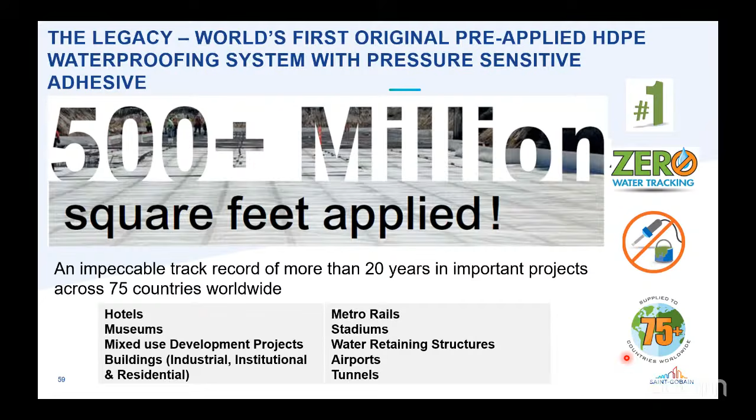We are one of the leaders in this type of product. Since this product was launched, more than 50 million square meters of it has been used in many projects all across the world. The application is similar to the previous one: on the PCC there is a waterproofing membrane applied, then all construction joints are treated with a swellable water bar, and then the concrete is casted. This can be done on the horizontal side and also for the vertical side for confined areas.

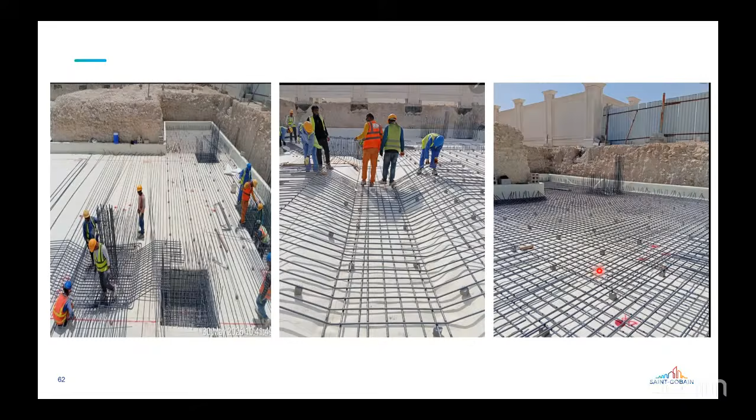These are some application photos where you can see the waterproofing membrane has been applied, and then reinforcement bars are directly placed over the waterproofing membrane. Wherever you have a wall, lift pit, or other projections on the raft, a PVC water stop will be provided, because after casting the raft you'll be having a construction joint. At that predetermined location, you can fix a PVC water stop before the concreting works.

Here you can see a lot of penetrations and pipes - pressure release pipes and other things. This is drainage pipe and also the PRP pipes and all that. All these are embedded into the waterproofing system, and we do proper sealing using an epoxy grout around all these pipes.

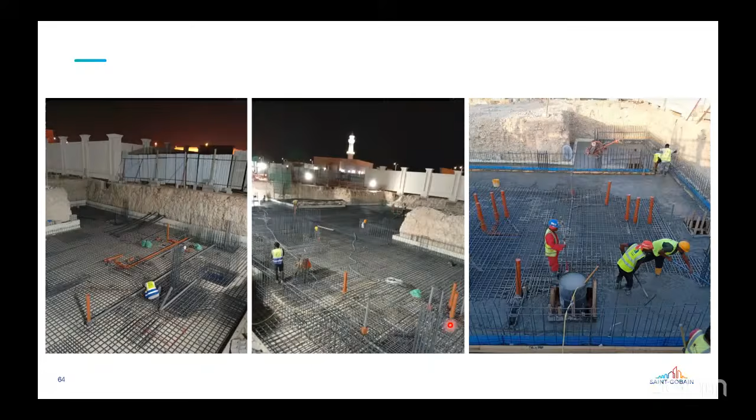Finally the concreting is done up to half the thickness of the water stop, so the concrete is directly poured onto this membrane. Once you pour the concrete, because there is an adhesive on the top side of the membrane, it bonds to the freshly poured concrete.

There are different products available depending on different site conditions, and we have to select the type of product that needs to be used. All these products are available at different thicknesses - we have 1.2, 1.5, 1.8 millimeters. Depending on the thickness of the raft and the size of the rebar used for construction of the raft, you need to select the right waterproofing thickness.

Important parameters of the product - as I mentioned, this product is very robust and doesn't get easily damaged during normal site activities of pouring concrete. It has got a very good puncture resistance, which has been tested as per ASTM E154. Once we lay it on the blinding, it has got very good UV exposure resistance.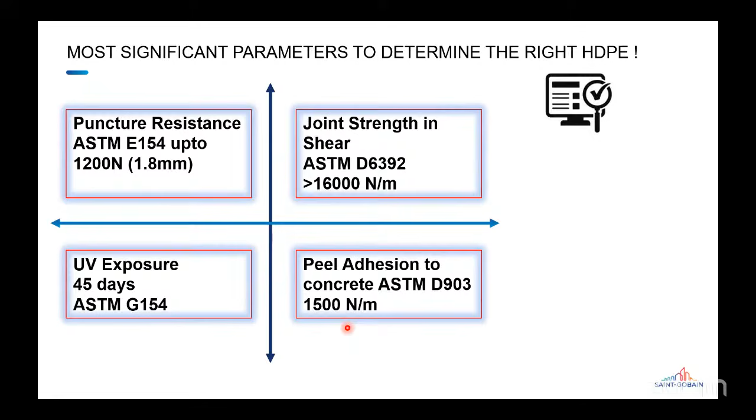And then the peel adhesion - this is basically how good the bonding of this membrane is with the concrete. All these tests, 4 important tests, are carried out for any kind of pre-applied waterproofing membrane to ensure that the quality of the product is as per the specification or requirement.

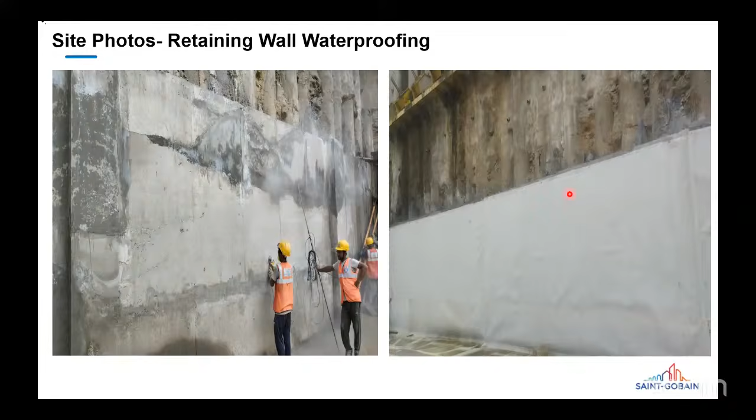In certain cases, when we do the waterproofing, where there is a high water table area or multi-level basements, to ensure proper water tightness, a double layer system is done. We have some special products used for the double layer waterproofing system. The first layer is done, and then the second layer is applied over the first with a staggered joint.

When it comes to pre-applied waterproofing membrane, we have two brands available in Saint-Gobain. One is the Fosroc membrane HDPE, and the other is Preprufe. Both brands are available in the Sri Lankan market. The Fosroc membrane HDPE is a sand finished membrane, while Preprufe is a smooth finish membrane, a product well known in the global market and used in many prestigious projects worldwide.

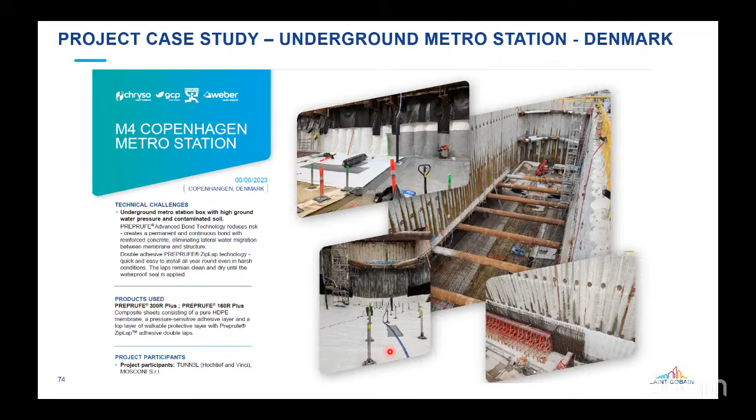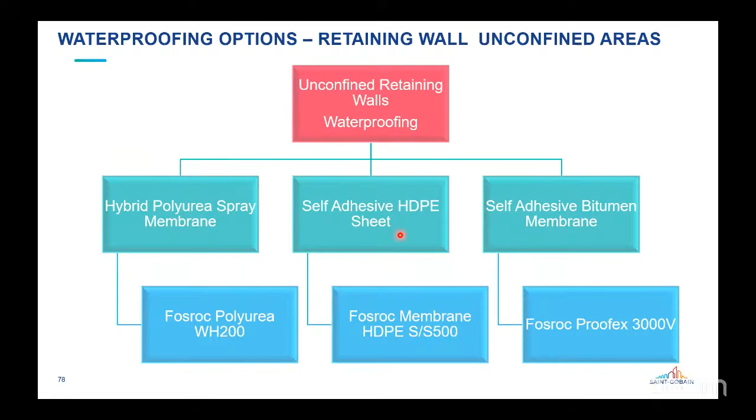There are other applications for the waterproofing membrane. For example, when it comes to the unconfined retaining wall - unconfined meaning there is a working space between the excavated surface of the soil and the retaining wall - waterproofing is done after the retaining wall is constructed. In that condition, you have various material options available: a liquid applied system based on hybrid polyureas, self-adhesive waterproofing systems based on HDPE, and self-adhesive bitumen membranes.

Polyurea waterproofing is a liquid applied system, a spray applied waterproofing system. There are different grades of polyurea available: aromatic polyurea and aliphatic polyurea. Aromatic polyureas are not UV resistant and have to be used in concealed applications not directly exposed to sunlight. The grade of polyurea used for waterproofing purposes is basically a hybrid polyurea.

The advantages of this product: it is a system which is very robust, with very high mechanical properties, and it's a spray applied system which cures within 10 seconds after application. Any water ponding test can be done, or it can be left exposed to rain or other site activities after 3 hours of application. It is a product for when you need a continuous, seamless, jointless waterproofing system, whether it is a roof slab, a retaining wall, or internal surfaces - polyurea is one of the best options.

We have also done the service life testing for this product as per EN 13251.

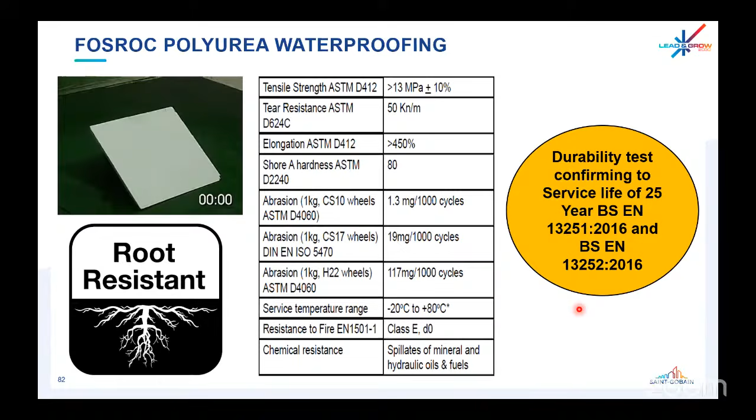And this product is highly elastomeric in nature. It has got a good crack bridging property also. It has been tested for static crack bridging of 8 millimeters and dynamic crack bridging of 3.2 millimeters. It means that when a waterproofing treatment is applied on this concrete substrate, in the event of any kind of cracking in the substrate, these products are able to withstand the crack movement without compromising on the waterproofing integrity of the structure.

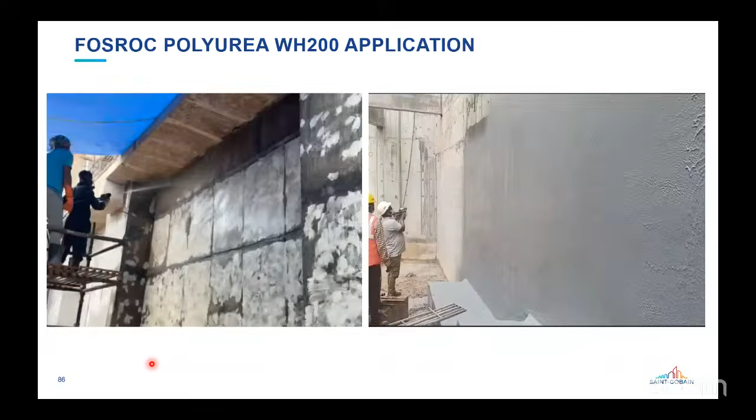So the method of application is basically it's a spray applied system. You can see here. So once the waterproofing system is done on any external wall, the retaining wall, then we put a protection board of a drain or a dimple sheet before the soil backfill is done.

So the advantage of this product, like I mentioned, is that there is no joint in this waterproofing system. It's a continuous waterproofing, and it has got excellent resistance against root penetration or any kind of attack by the subsoil chemicals.

So normally the waterproofing, this section you can see here, you have the PCC or the blinding concrete on which the pre-applied waterproofing membrane is applied; it's a sheet waterproofing membrane. And then the spray applied waterproofing membrane is done on the retaining wall, which will be overlapped here over the waterproofing membrane coming from the raft slab. And all the construction joints will be treated with a hydrophilic waterbar.

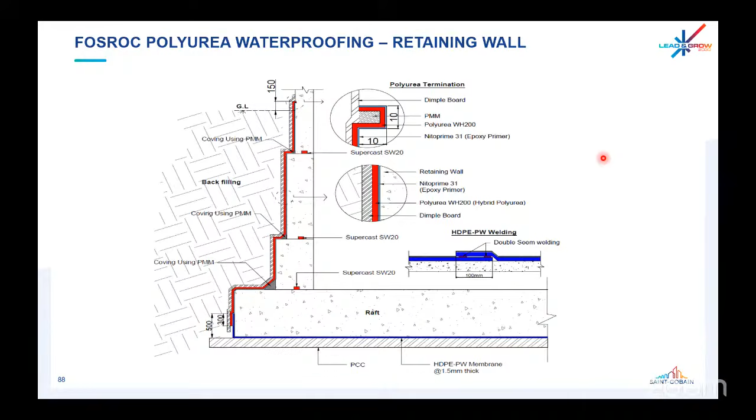Some more applications: wherever you have a post-construction waterproofing requirement, there is a post-applied waterproofing system, which is a self-adhesive HDPE-based waterproofing system, which can be done for retaining walls as well as for individual footings, lift pits, all these applications. This is a very easy application, like a peel and stick method. After proper surface preparation of the substrate, you can directly apply this sheet on the substrate and then you fix a protection board and then backfill this area with soil.

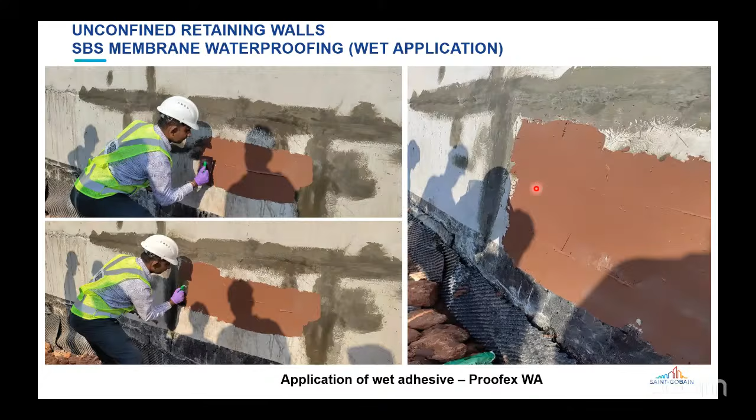So here we have an adhesive which is used, for example, if you have a substrate which is wet or damp. If you want to do a waterproofing application immediately after rain, there is a special adhesive available with which you'll be able to apply the waterproofing material even if the concrete surface has got high residual moisture. So some more applications of this product.

So coming to another treatment we normally do in substructure waterproofing, the pile top treatment, because for certain types of foundation design you need the pile foundation. So on that there is a PCC layer with the pile protruding from that area. So this is a very important point in any waterproofing system that needs to be properly sealed.

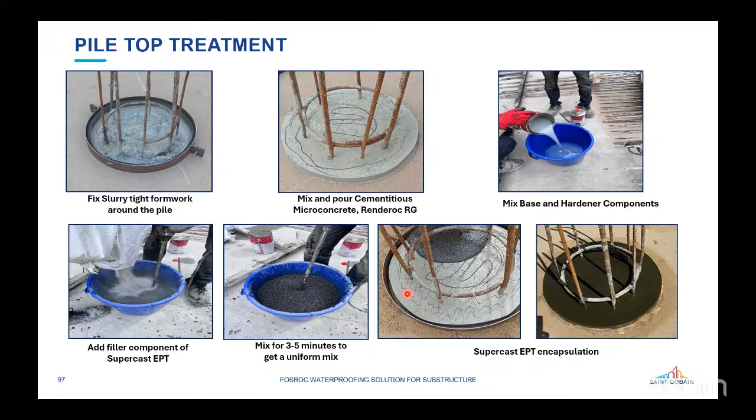So some more application photos of pile head treatment. You can see this is a Proofex Engage waterproofing membrane, and then the pile head treatment has been done with an epoxy grout here.

Another important treatment that is normally done in areas where very high water pressure is there is rock anchoring. Rock anchoring is done if there is a very high water pressure which has the capacity to uplift the raft foundation. In that case, the raft will be anchored to the base using the rock anchors. Most of these rock anchors will be passing or puncturing through the waterproofing membrane. So it is very, very important that all these penetrations are sealed properly with an epoxy grout.

Coming to the tie rod holes: when a retaining wall is constructed with a two-side formwork, you will be having a lot of tie rod holes in the structure, which are potential paths of water leakage. So all these need to be properly sealed using a proper watertight material.

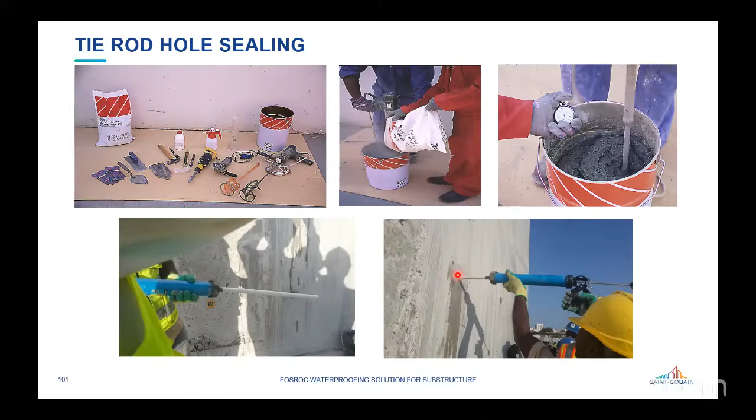So here you can see how the application is done using a sealant gun. We load the tie rod hole repair mortar, and then it is injected into the tie rod hole. The sealing is done and the waterproofing is carried out.

So when there is a construction joint or an expansion joint in a structure, there's a possibility that the water can get in through those joints. So there are sealing systems available for those joints, which are PVC water stops, which are placed on the external side of the construction joint or in the middle of the construction joint. There are different profiles available for the PVC water stops.

Some profiles are used for the construction joints, which are placed internally or externally, and there are other profiles with a central bulb, which are basically used for the expansion joint. So when there is a movement of the expansion joint, this central bulb is provided to release the stress, which will also expand along with the movement of the structure, because all these water stops will have an elongation of almost 300%.

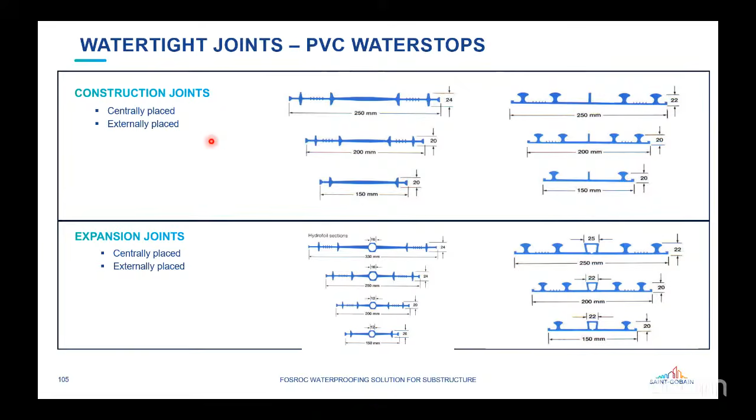So these are some of the applications of the PVC water stops. Wherever there is a construction joint or an expansion joint, these are provided to make the joint watertight. Another type of water stop that is used for joint sealing is a hydrophilic water bar. If we cannot provide a PVC water stop, the hydrophilic water bar is provided. These types of water bars, when they come in contact with water, swell and fill the joint.

So these are typically the products which are used for sealing any kind of a construction joint in the concrete or any kind of an I-beam penetration or pipe penetration in the concrete, where you need to make that penetration point completely watertight.

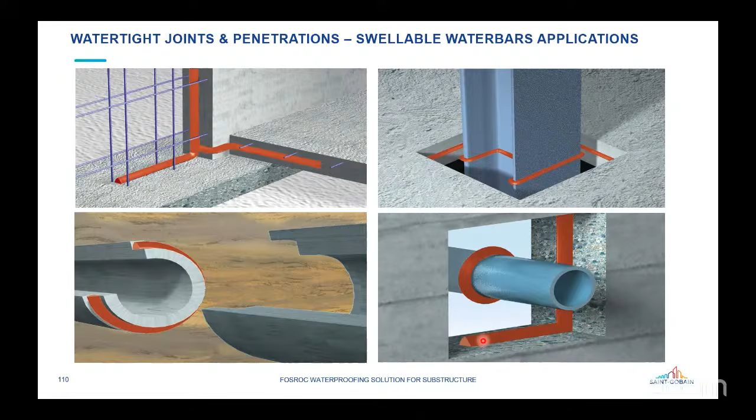So coming to the end of this presentation, I'll just give a recap of it. The selection of the appropriate waterproofing system is very, very critical because, like I mentioned, for substructure waterproofing, the right system has to be selected at the time of construction. Otherwise, it's very, very difficult to do any kind of repair, or it is not possible to redo the waterproofing in case of a substructure.

So there are different choices of materials that are available. Like we discussed, the preformed sheet membranes, which are based on HDPE and bitumen sheets. And then there are cold applied or hot applied liquid types of waterproofing systems, which are based on polyurea. Post-applied waterproofing systems are also available.

As per BS 8102, it is very, very important that we use the pre-applied waterproofing membrane. Like I mentioned, a pre-applied waterproofing membrane is a system which bonds to the fresh concrete, and even in case of any settlement of the structure, the waterproofing integrity of the structure can be maintained.

And then the most important thing is that special attention must be given to all the detailing in the waterproofing. For example, any kind of a construction joint or an expansion joint or a pile penetration or any kind of a service penetration, which can form a discontinuity in the waterproofing membrane. So enough attention and care must be given to sealing all those locations in the waterproofing system to ensure complete water tightness.